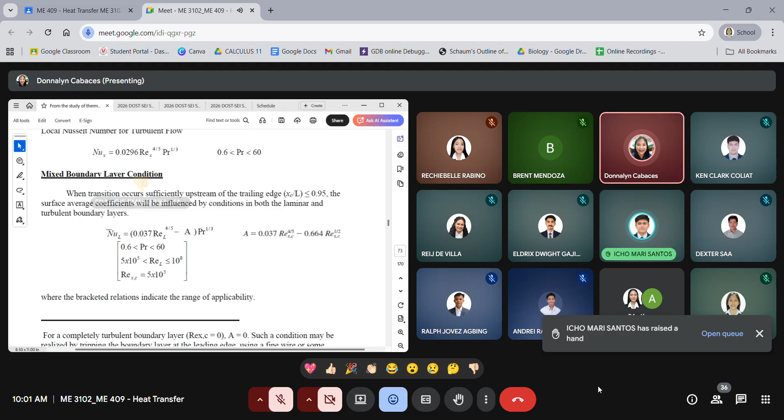May I know what was the last topic discussed in our module 6? How far did we get in our last discussion? We haven't been able to discuss since there was no internet last time, and then Thursday was our next class, so still nothing. We haven't started chapter 6 yet, chapter 5 also not yet. So we go to chapter 5, which is all about the introduction to convection, is that right?

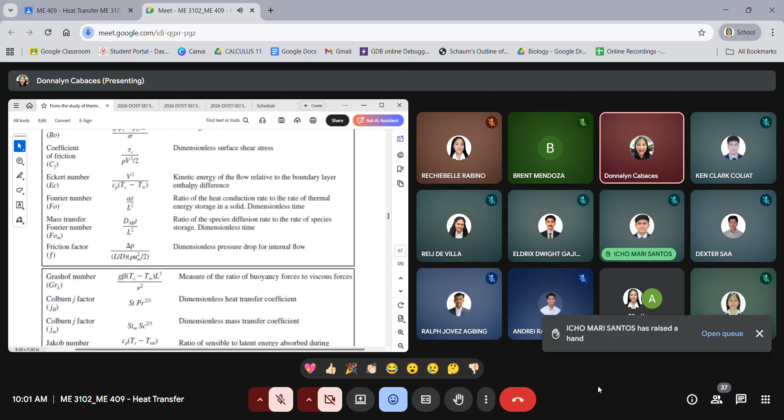Okay, let's go to our module 5 and discuss this one, and after this we proceed with our section 6. So our module 5 is introduction to convection.

So most of the topics here, part of module 5, were already introduced to you when we had our introduction, when we discussed the different modes of heat transfer in chapter 1. There are just additional concepts, and especially the last part, which is all about the dimensionless parameters that we are going to use in convection heat transfer analysis.

So for our intended learning outcomes for our module 5: differentiate velocity and thermal boundary layers of convection, and understand the different dimensionless groups of heat and mass transfer, their equation and interpretation.

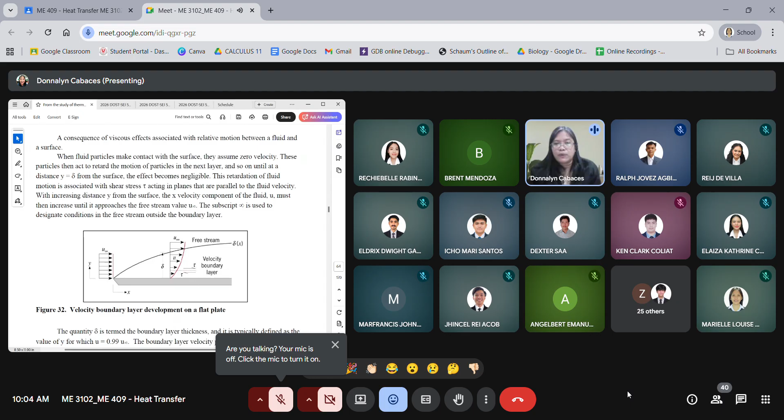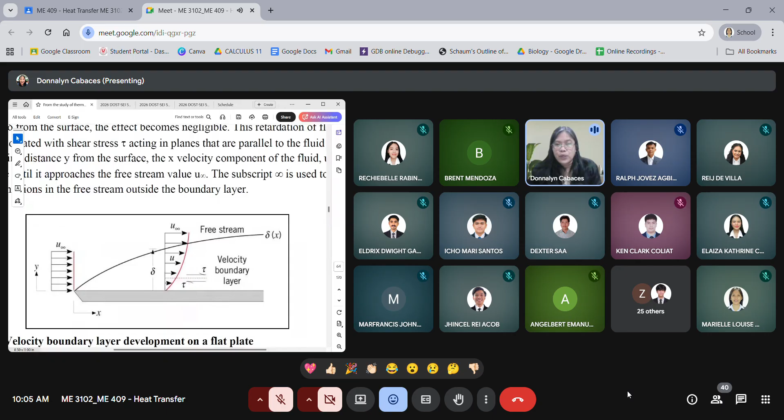So as you notice here in our figure, starting from the surface, the velocity of the fluid or the x component of the velocity is equal to 0 at the surface. But as it goes further away from the surface, the velocity of the fluid increases. And there is the so-called delta, the lowercase delta, which is the velocity boundary layer thickness.

As mentioned here, you have this distance y, which is equal to delta, and that is equivalent to this value. So this quantity delta is termed as the boundary layer thickness, which is typically defined for a value of y where the velocity is equal to 0.99 times the x component of the velocity of the fluid. So that's our quantity delta, which is our boundary layer thickness.

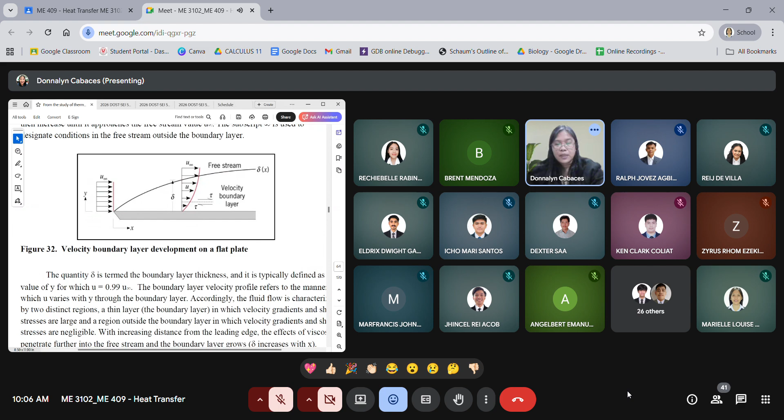So you have to determine this thickness in such a way that this value of the velocity is 0.99 times the x velocity component of the velocity of the fluid. So again, started from the velocity which is equal to 0, as you see from the profile, our red-colored diagram, the velocity increases from the surface.

And then, the other one is the so-called thermal boundary layer. Still, that is a consequence of heat transfer between the surface and the fluid. And as you see in our next figure, there is a difference between the velocity boundary layer and the thermal boundary layer.

So earlier, if this is a heated surface, our velocity profile started at 0 and then it increases as it moves further away from the surface. But for the thermal boundary layer development on an isothermal flat plate, what do you notice in the curve, in our red-colored curve?

Since this is the heated surface, the temperature is higher near the surface. But as it goes further away from the heated surface, the temperature decreases. So it's the opposite of velocity. Velocity goes from here to there, that's our curve from earlier. But here, since it's a heated surface, as you move away from it, the temperature of the fluid will decrease. So it's the opposite of our velocity and thermal boundary profile.

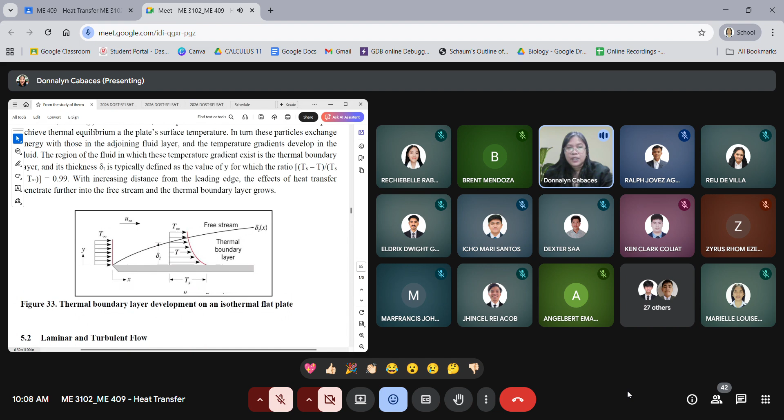Delta T, as mentioned here, is defined as the value of y for which the ratio of Ts minus T divided by Ts minus the temperature of the fluid is equal to 0.99. So you have to determine that value, and that is the so-called thermal boundary layer thickness.

So that is our value, the value of y for which the ratio of Ts, the temperature of the surface, minus T, the value of the temperature in our profile, divided by the difference of Ts minus the temperature of the fluid, equals 0.99. The value of y that corresponds to that ratio is the so-called thermal boundary layer thickness.

So that's the difference between our two profiles, the velocity and the thermal boundary layer development.

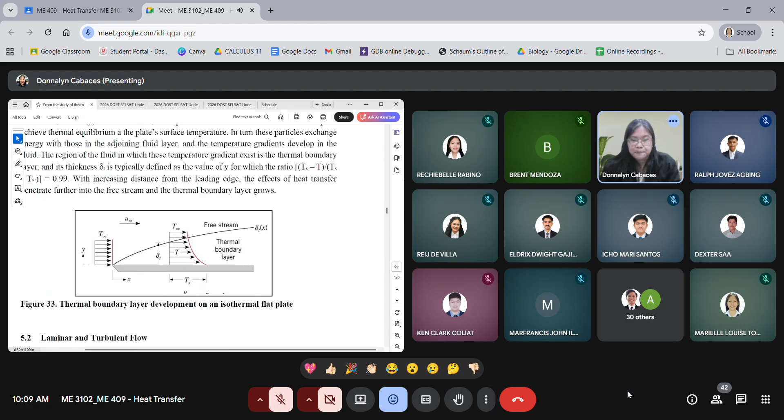Now the next section is laminar and turbulent flow. It's important to know first what type of fluid flow we have, because later, in our next chapters, you will see that the empirical equation we use to find the Nusselt number depends on the type of flow, whether it is laminar, turbulent, or in the transition region. So how do we know if it is laminar or turbulent?

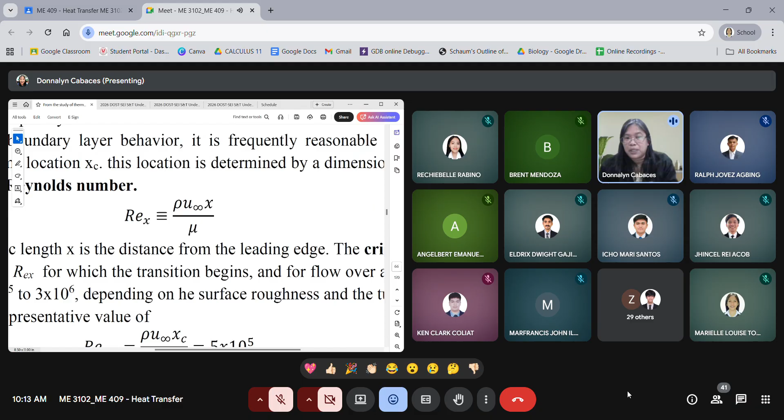So what are the components here? If we are talking about the Reynolds number at a specific point, that's why we have X. For example, on the flat plate we showed earlier, if we are just interested in, say, 0.25 meter from the leading edge.

Pag sinabi nating leading edge, balikan ko lang yung figure. Kung ito po yung ating 0 point, ito po yung ating leading edge. So kung halimbawa ito ay 1 meter long, yung ating flat plate, kung interested lang tayong alamin natin yung value ng Reynolds number sa ating part na ito na say 0.25 meters, ito po yung particular point X.

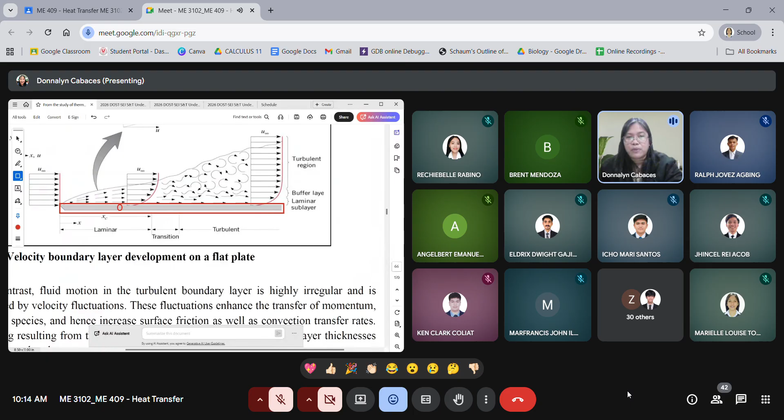Kaya tinatawag na Re_X. Pero kung interested tayo to determine yung ating Reynolds number sa entire length ng ating flat plate, then we make use of Re_L, ibig sabihin entire length. Yun lang po yung ating gagamitin na nomenclature.

So Re_X ay para sa specific point X. Ang rho po natin ay density. Ang U sub infinity po ito ay velocity ng fluid, at X po ay yung specific point. Ang mu po natin ay ang absolute viscosity. Minsan po hindi absolute viscosity at density yung binibigay, kundi yung tinatawag na kinematic viscosity, o yung makikita sa table. Ang relationship po natin, ang ating absolute viscosity divided by ating density, ay equivalent sa kinematic viscosity.

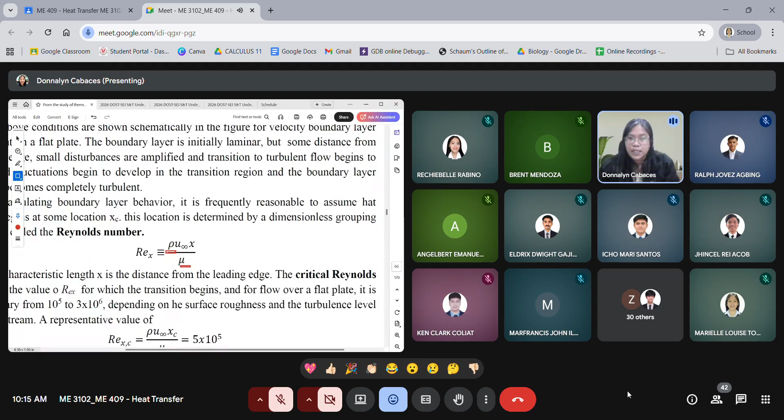So instead na ganito yung ating formula, it would be velocity times x divided by kinematic viscosity. Ang kinematic viscosity po natin, ginagamit natin ang lowercase v bilang symbol para dito. At ang values nito ay determined from the table of properties natin.

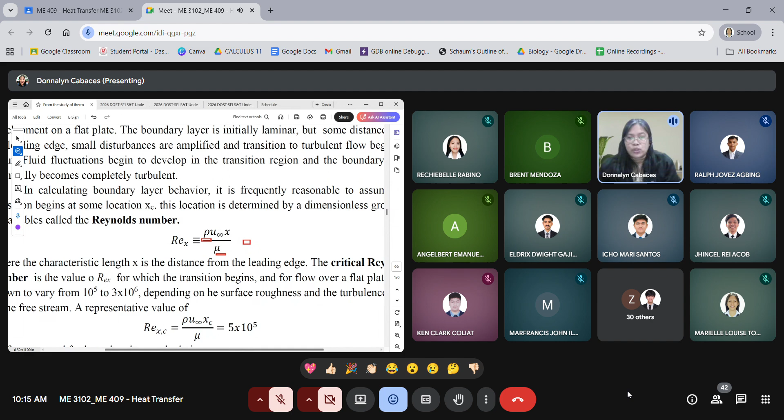Okay, so again po, yun po yung ating equation ng Reynolds number. Ang x ay ating characteristic length, distance from the leading edge, at ang rho ay density, velocity, at absolute viscosity.

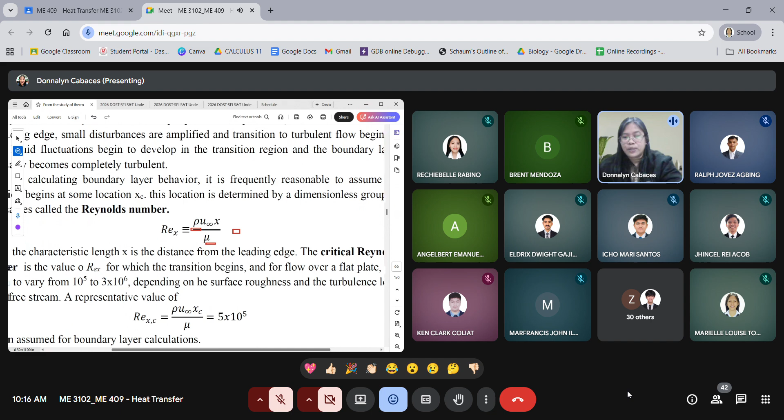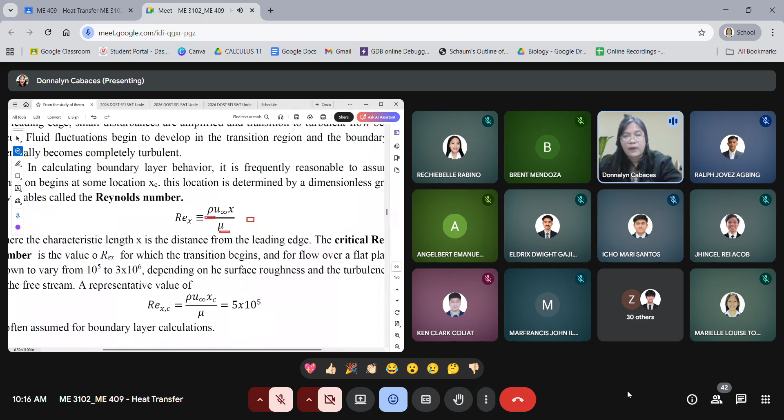So ngayon, values from 10 to the 5th to 3 times 10 to the 6th ay tinatawag na critical values ng Reynolds number. Ibig sabihin, below 10 to the 5th ay laminar, at above 3 times 10 to the 6th ay turbulent. So yung 10 to the 5th to 3 times 10 to the 6th, yun po yung tinatawag natin na transition region.

Pero isang representative value, which is equal to 5 times 10 to the 5th, ang ginagamit natin para ma-determine kung saan ang critical value o critical length, kung saan nagsisimula ang transition. Dito sa region natin kanina, laminar, transition, at turbulent, we make use of 5 times 10 to the 5th bilang representative value. Ito yung gagamitin natin later para ma-determine natin where is the critical point.

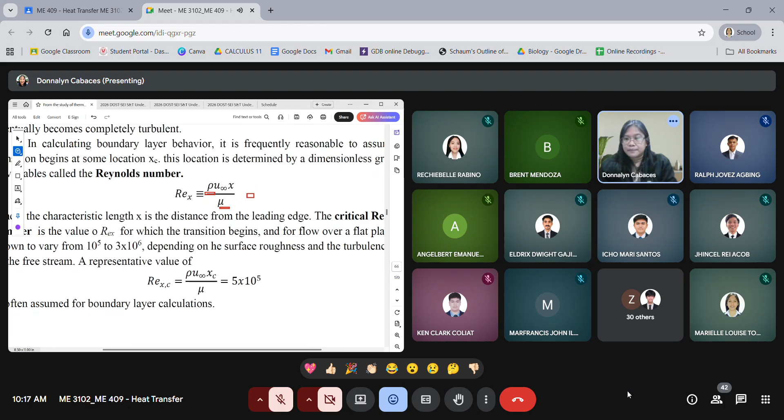Naintindihan po, class? Questions po or clarifications? Wala po. Okay po, sige po.

Punta po tayo sa ating next section. Ang next po natin ay yung mga different dimensionless parameters. So binigyan kayo ng table 5 ng iba't ibang selected dimensionless group ng heat and mass transfer parameters na gagamitin natin sa discussion o analysis ng convection heat transfer. Hindi ko na po ito iisa-isahin. I will leave this to you to study kung ano po yung tawag sa ating dimensionless group, ano po yung kanyang formula, at ano po yung interpretation o definition nito. Pero ang definition dito ay refers to the formula for each dimensionless parameter, at meron din tayong interpretation.

Banggitin ko lang po yung most commonly na magagamit natin sa ating discussion from chapter 6, 7, and 8, which are all about convection. We talk about external flows and internal flows. Under ng external flow, meron tayong forced and free convection. Under ng force, yung ating external and internal flows, at meron din tayong free convection. Na-discuss ko na sa inyo during our introduction kung ano yung pinagkaiba ng forced and free convection. Una nating didiscusin yung forced convection, in which there are two types, the external flow and the internal flow. Dapat ma-identify nyo muna kung ano yung type ng ating convection heat transfer, kasi magkaiba din ang empirical correlation na gagamitin natin for external flow, for internal flow under forced convection, and also for free convection.

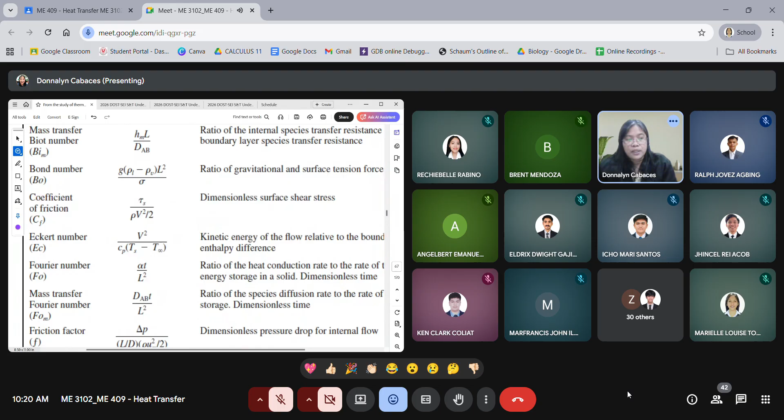So these are the dimensionless parameters. We have the Biot number, the Bond number, the coefficient of friction, the Eckert number, the Fourier number, the mass transfer Fourier number, the friction factor. Then we have the Grashof number.

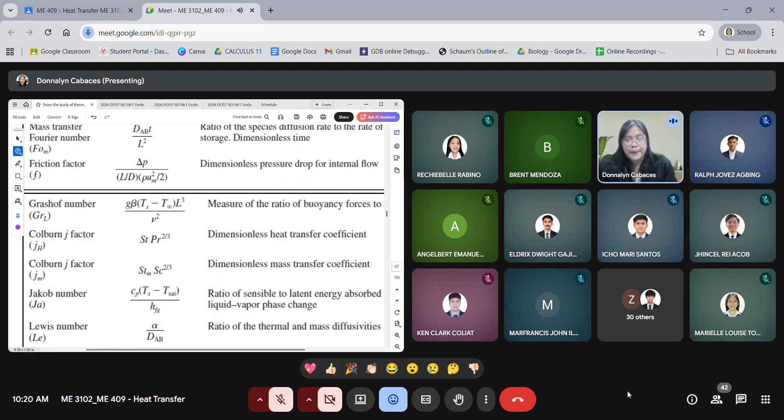The Grashof number we will use in our free convection discussion. We have the Colburn factor, the Jakob number, and we are also going to make use of this in our discussion of free convection.

We also have the Lewis number, the Mach number, the Nusselt number, Peclet number, Prandtl number, Reynolds number, Schmidt number. These dimensionless parameters will be commonly used in our discussion and analysis of convection heat transfer.

What is the Nusselt number? The Nusselt number is the ratio of convection to pure conduction heat transfer. If the value of our Nusselt number is equal to 1, it means our convection and conduction heat transfer are somehow equal. If it is less than 1, it means our conduction heat transfer is higher than our convection. If it is higher than 1, then convection heat transfer prevails.

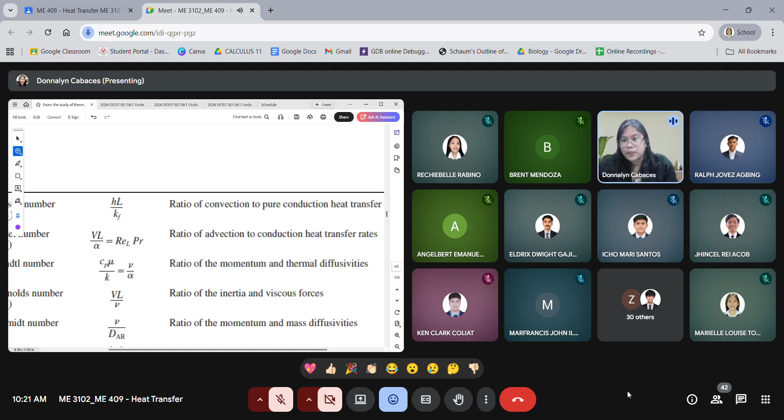Look at this equation or formula for the Nusselt number. Nusselt number is equal to HL over K. Our H is the convection heat transfer coefficient. Our L, if we are talking of NuL. But if it's a specific point, that would be represented as NuX, so it would be X instead of L. Your K here is your thermal conductivity.

So when or where are we going to make use of this Nusselt number? The Nusselt number will be obtained empirically, meaning we are going to make use of the empirical correlation. What is the meaning of empirical correlation? They are equations that have been obtained through a series of experiments by different authors.

So they conducted experiments. Later, we will present the setup they used in their experiments. They conducted several experiments, they have their results, and what they do is try to represent or interpret the results and make use of correlations. So they develop their correlations for specific applications in our convection heat transfer analysis.

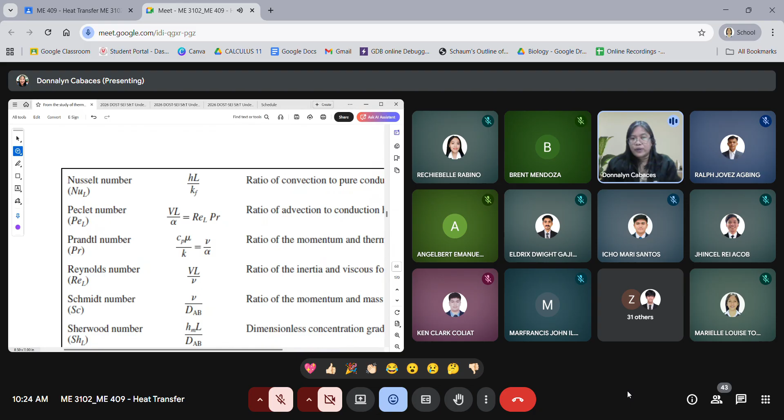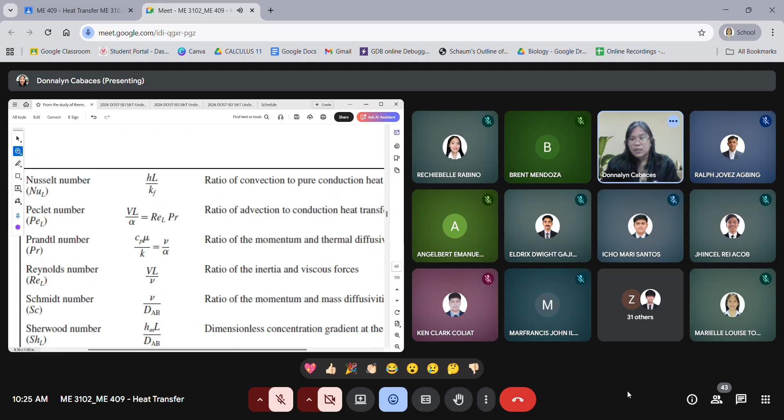So here is one equation: VL over nu. Again, V is velocity, L is the length, and nu here is the kinematic viscosity, which is the ratio of inertia and viscous forces. We also sometimes use the Schmidt number, if you are given the kinematic viscosity and the value of the mass diffusivity, that is the ratio of momentum and mass diffusivity. Then we also have the Sherwood number, Stanton number, the mass transfer Stanton number, and the Weber number.

The formulas and definitions I discussed are the most commonly used in our convection heat transfer analysis.

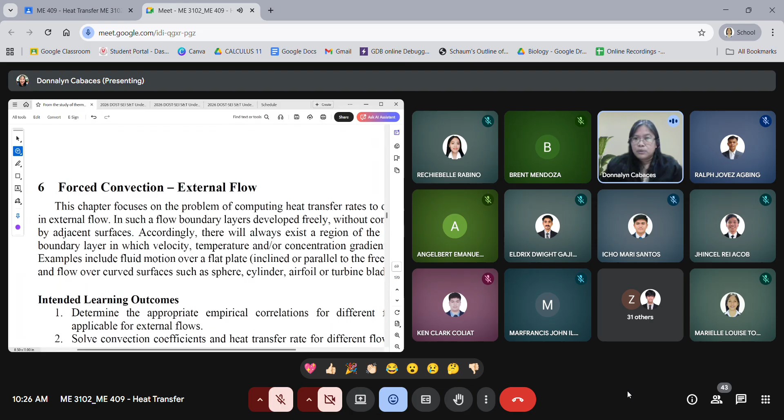Okay, sige po. Punta po tayo sa section 6, which is forced convection. Again po, we will be analyzing force and free convection. So this chapter focuses on the problem of computing heat transfer rates to or from a surface in external flow. So yun po yung ating chapter 6.

So force convection po siya, external flow. Ang chapter 7 po natin ay force convection, internal flow. So again, as we mentioned last time when we had the introduction to convection, when we say force convection, we are making use of external forces in order for us to have the fluid flow.

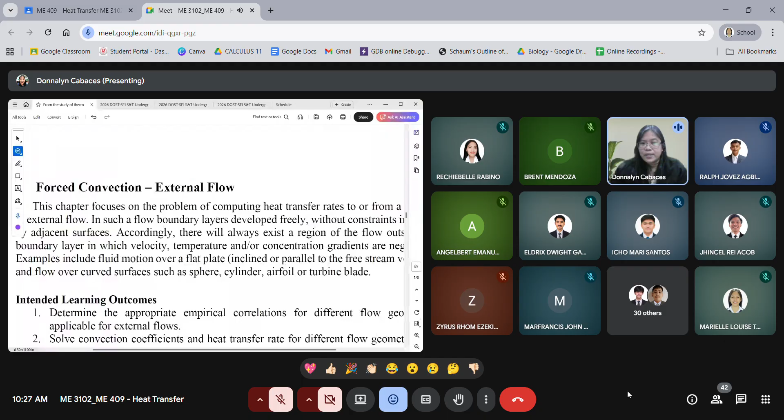So in such a flow, boundary layers develop freely without constraints imposed by adjacent surfaces. So accordingly, there will always exist a region of the flow outside the boundary layer in which the velocity, temperature, and or concentration gradients are negligible. And examples include fluid motion over a flat plate, inclined or parallel to the free stream velocity, and flow over curved surfaces such as sphere, cylinder, airfoil, or turbine blade.

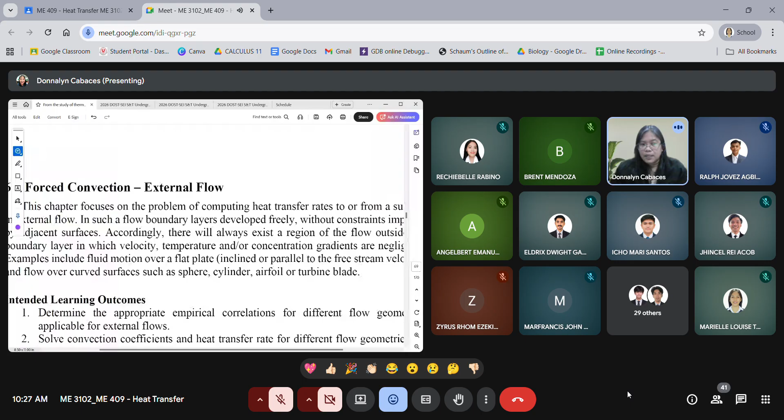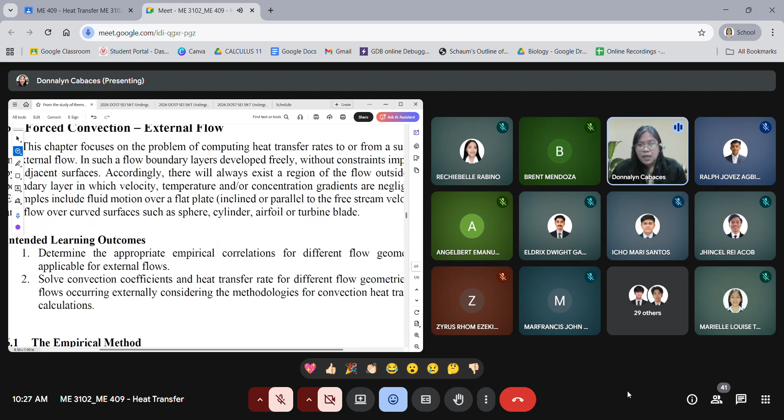So our intended learning outcomes for this chapter: determine the appropriate empirical correlations for different flow geometries applicable for external flows and solve convection coefficients and heat transfer rate for different flow geometry occurring externally, considering the methodologies for convection heat transfer calculation.

So as you see in our intended learning outcomes, the first one is for us to identify or to determine the appropriate empirical correlations. And then after that, we will be solving yung ating value ng H and also yung convection heat transfer values or rate.

No? So, as we proceed with our discussion, alam natin na siya ay force convection and external flow because that is the chapter that we are discussing. Pero later, kapag po tayo ay nakatapos na nung next 3 chapters natin, nung force convection, external and internal flow, at saka ng free convection, labo-labo na po yung ating problem, no?

So you will be the one to identify first whether are we talking of force or free convection, no? And after po na malaman natin na siya ay force convection, identify are we talking of external or internal flow. Madali lang naman kung alamin yun, ano?

So titingnan mo lang kung siya ay meron bang external means, external forces to have the fluid flow or the fluid motion. Kung meron, so that is force convection. Kung wala, that is free convection.

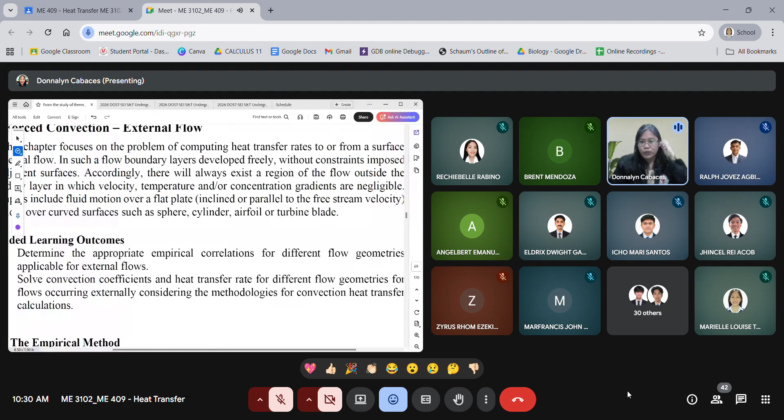No? So merong different types ng fluid na ginamit ng ating authors. Some of them, they use air, they use water, they use engine oil, they use other gases. And then they tried it at different velocity and they tried it at different temperature of the fluid. And they measure yung ating surface temperature, no?

And then after that, since they conducted several values of the parameters, so nagkaroon sila ng iba't ibang or ng maraming data. So once they have the data, they try to analyze and interpret the data, and they come up with the empirical equation in which that equation represents yung kanilang results na nakuha.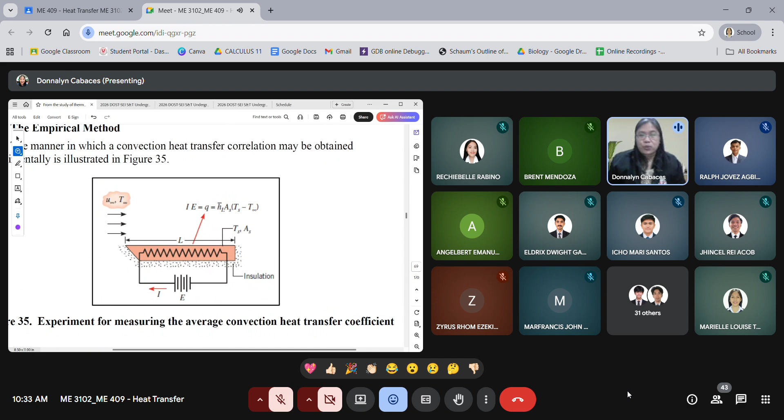So if you want, you can go into this experimental setup in our project study and to prove something about the empirical equations and then try to evaluate or to make use of other geometry, or it can be other types of fluid with different fluid velocity and temperature, and baka makakam up tayo ng sarili nating empirical equation. So yan po yung ginamit nilang setup or experiment in order for them to come up with the different empirical equations that we are going to have later.

Okay? So the different dimensions, the different empirical equations emanate from this.

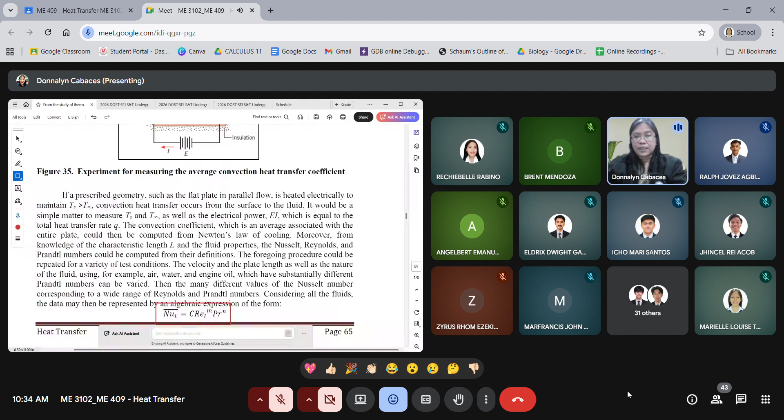Ito po yung naging generic na representation natin ng formula ng Nusselt number. That is equal to C times the Reynolds number raised to M times the Prandtl number raised to N.

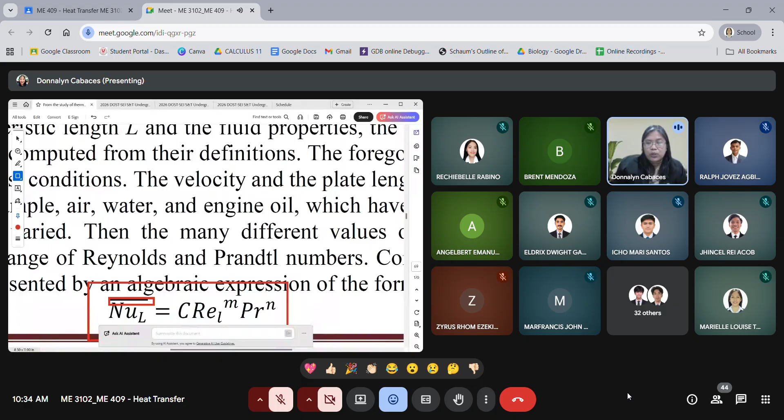So itong may bar na ito sa itaas, that represents average Nusselt number. Pag po wala yung bar dito sa taas, that is the local Nusselt number. So ano po yung pinagkaiba ng average at saka ng local Nusselt number? It is local kapag specific point lang along, say, the surface ng ating flat plate. Pero kung ang pag-uusapan natin is the entire length of the flat plate, then we will be talking of the average Nusselt number.

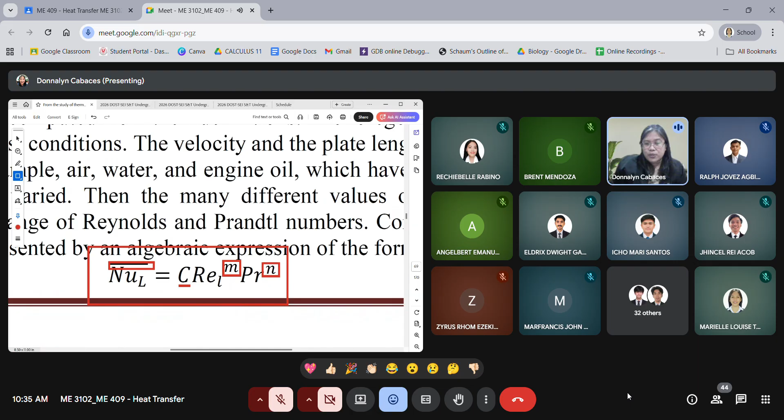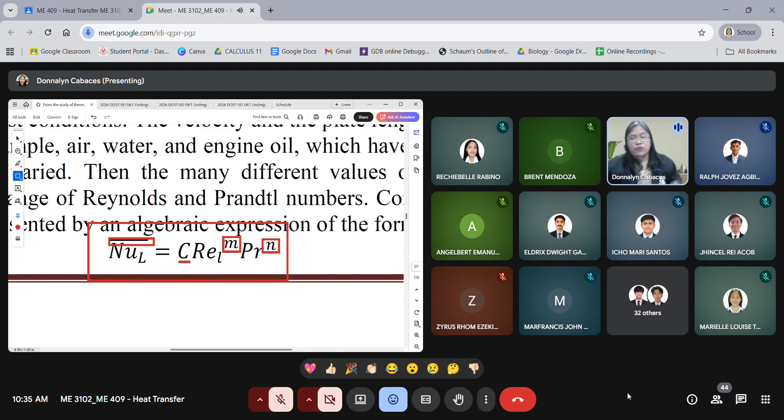So as you will see later, there would be some differences in the value of C, that is the numerical coefficient or constant. The value of M, which is the power or exponent of the Reynolds number. And our N would be the power or exponent of our Prandtl number. So ayan po ang ating equation para sa Nusselt number. As we proceed later, you will see difference in value of C, M, and N for the different geometries that we are going to discuss.

Punta po tayo sa ating next page. Take note that we are now to define the so-called film temperature. Ano po yung film temperature? Film temperature is the average of the surface and the fluid temperature, in which most of the properties are to be evaluated in this film temperature.

Ma'am, ano po yung properties? So yung mga properties na kailangan natin kuhanin sa table, properties po ng material natin na gagamitin. So you have to evaluate po yung film temperature.

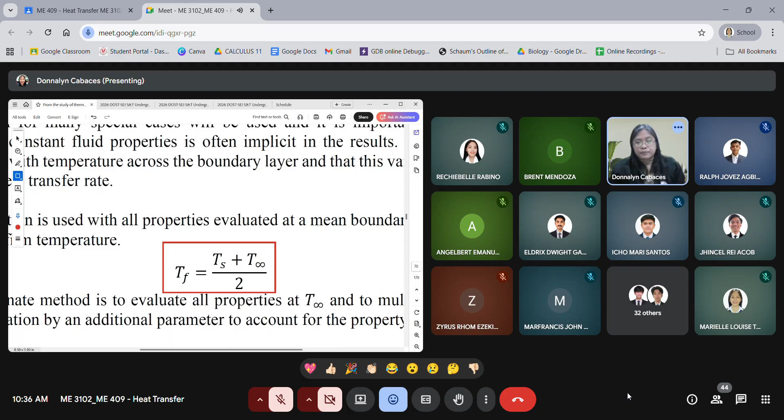Take note later sa mga empirical equations natin, meron pong mga properties that are to be evaluated at the fluid temperature. So kapag po sinabi ng requirement natin doon sa ating empirical equation na the properties are to be evaluated at the fluid temperature, then you have to evaluate them at fluid temperature. Kung hindi po na-mention, it is understood that you have to evaluate this at the film temperature. Sometimes po, meron din tayong subscript na S, which means that the property is to be evaluated at the surface temperature.

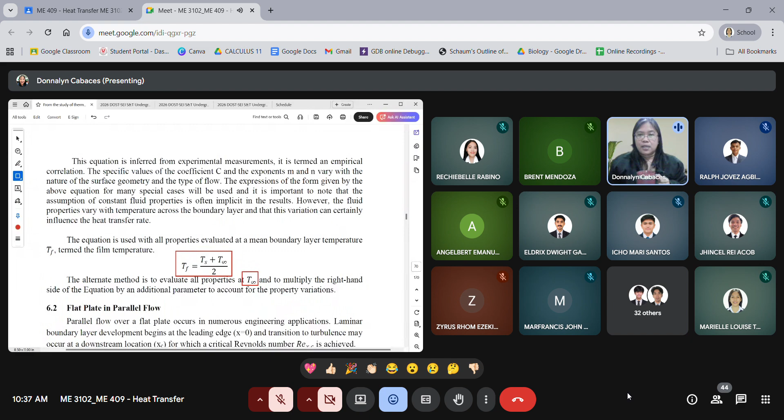So yun po yung ating initial discussion about po yung ating module 6. Now we proceed po with flat plate in parallel flow.

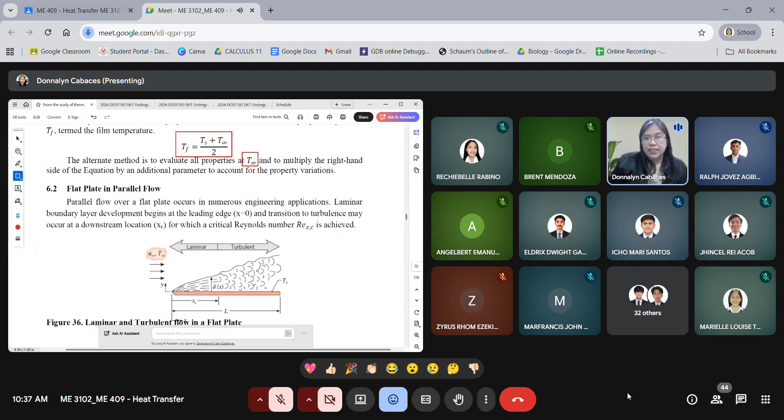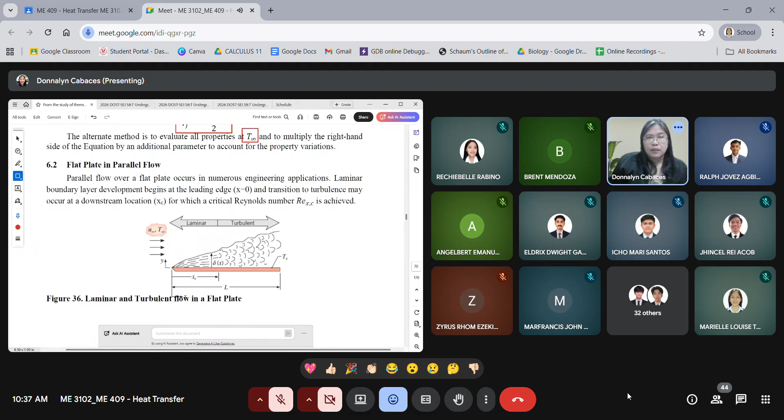So yan din po yung figure natin kanina, yung pinakita natin, yung laminar, turbulent, and the transition. This one is the laminar, then this point is the transition, and then you have here your turbulent flow. And this is a flat plate. We have here the velocity of the fluid and its temperature and the surface temperature of the flat plate.

Now, if we talk of convection heat transfer calculation, we have here the methodology for a convection calculation as suggested by the author of our reference book, DeWitt, Incropera, et al., Bergman, and Lavine. Sila po yung authors ng ating book or reference material.

So di ba, gagamitin pa rin po natin yung ating methodology for heat transfer calculation such as yung known, yung find, yung schematic, yung assumptions, yung properties, and then yung analysis at saka po comments. So under ng ating analysis, ito po yung ating susundin.

Ang una po, hindi po nakalagay dyan kasi nga chapter by chapter tayo or topic by topic. But the first thing that you have to know, kapag po tayo ay magsusolve na later, kailangan nating i-identify kung alin bang chapter yun. So you have to check first, are we talking of force or free convection? After knowing that it is force convection, are we talking of external or internal flow?

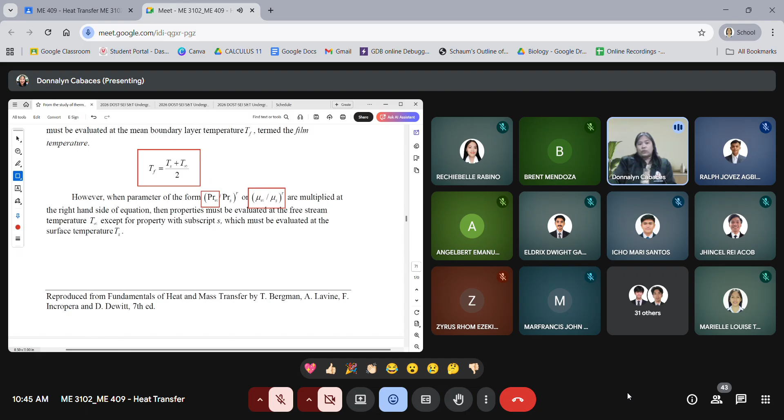Now, these are the empirical correlations that you are going to make use of. For external flow, that's already in your module. This one is for flat plate in parallel flow. So for flat plate, if we are talking of laminar flow, that means the value of the Reynolds number is less than 5 times 10 to the 5th. So we have our empirical equation for the local Nusselt number - this is our equation.

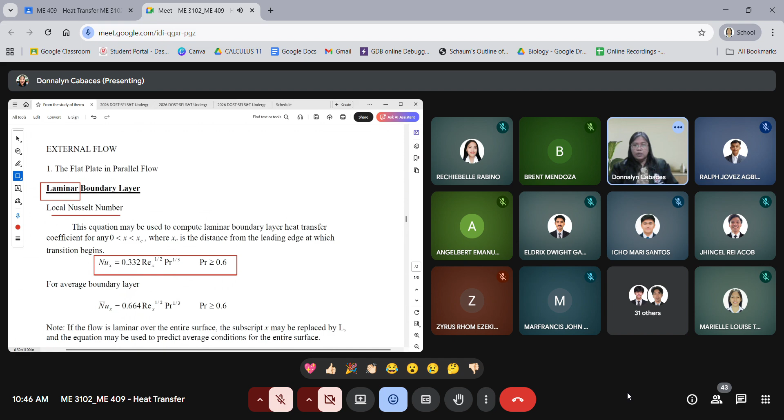And what's on the side, like this Prandtl number greater than or equal to 0.6, that is the point of applicability. So take note that this is for laminar flow, so our value of x is greater than 0 but less than the critical point.

Okay, so ang atin pong formula, 0.332, square root of the Reynolds number, cube root of the Prandtl number. Again, 0.332 is the value of C. Ang value natin ng M ay 1/2, ang value natin ng N ay 1/3.

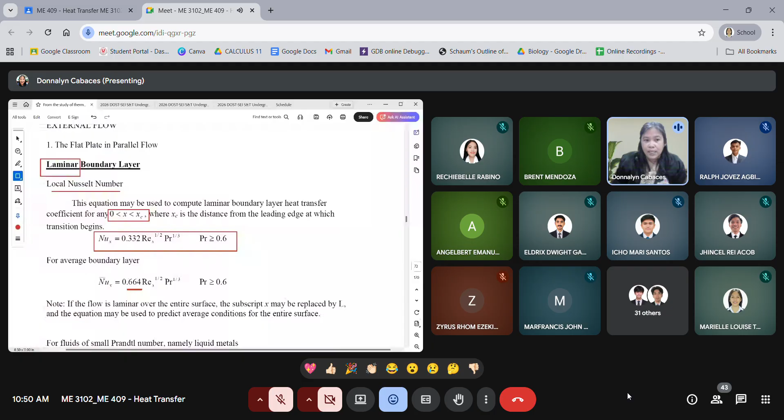Okay, so next po is for average boundary layer. As you see here, so ito ay local, 0.332. Yun pong ating average. As you notice, ang magkaiba lang po sa kanya is yung numerical coefficient. So naging 0.664, so it is just times 2. Kapag po local at kapag po average, you just multiply it by 2.

So note, if the flow is laminar over the entire surface, the subscript x po may be replaced by L, and the equation may be used to predict average conditions for the entire surface. So instead of NUX, you can make use of NUL.

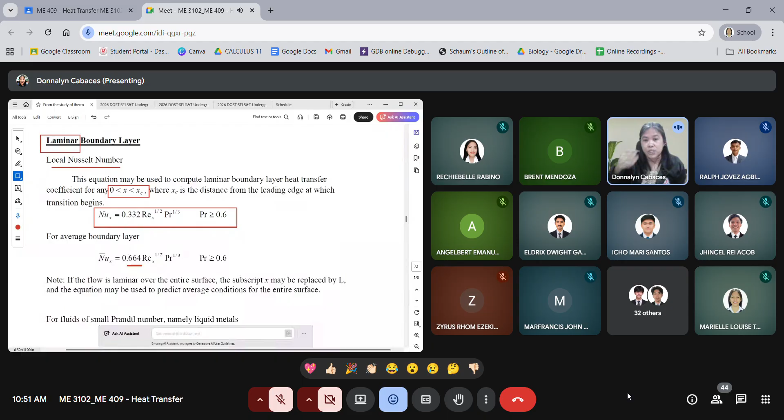Okay, and again po, yung notation natin ha. Pag local, ganyan lang. Pag po average, merong bar. So after this, pag nalaman natin yung ating Nusselt number, saka nyo kukunin yung value ng H, yung formula natin na HL over K. So out of that, you will find the value of H, and then you will find your Q convection.

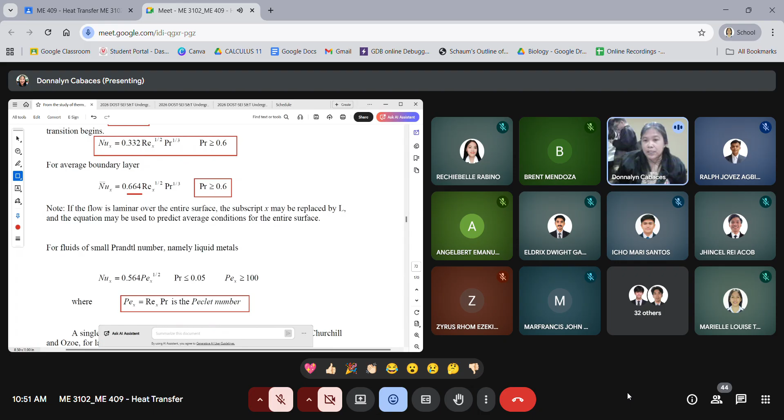Now, for small or for fluids of small Prandtl number, kasi ang requirement natin dito sa una, ang Prandtl number should be greater than or equal to 0.6. So what if mabababa lang yung value ng Prandtl number? So for this, for Prandtl number less than or equal to 0.05, but there is the requirement of the Peclet number. So take note that Peclet number is the product of the Reynolds and the Prandtl number.

If it is satisfied, then you can make use of this equation for the Nusselt number: 0.564 times the square root of the Peclet number. Okay, so another empirical equation po, a single correlating equation which applies for all Prandtl number, by Churchill and Ozoe.

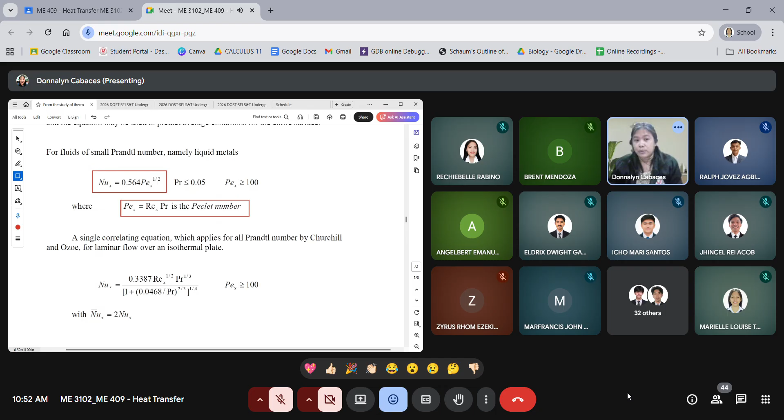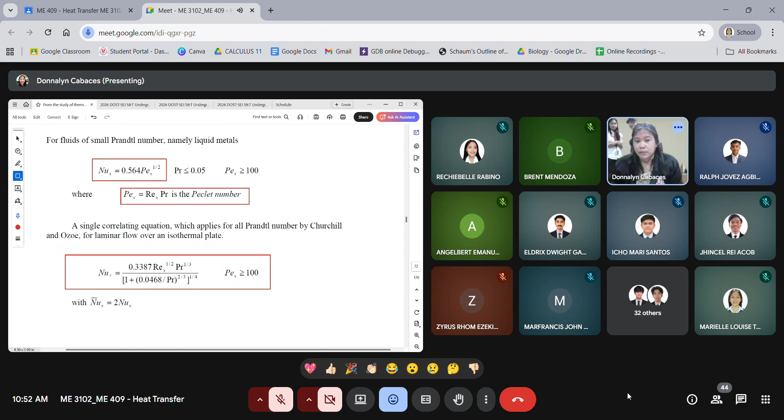So the laminar flow over an isothermal plate, we have this equation. Medyo mahaba na po yung equation kaya hindi natin yan pinapasaulo sa inyo. Okay, so take note of how you are going to press it in your calculator. And that is for the local, and for this one is for the average. As I mentioned a while ago, when you are asked for the average, you just multiply it by 2.

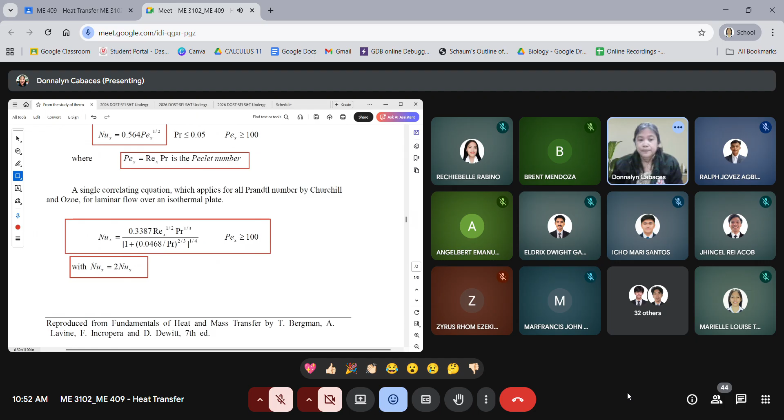Now, then another equation po, para naman po sa turbulent boundary layer. So pag turbulent boundary layer, this will be now our empirical equation. So iba na po yung value ng C at iba na rin po yung value ng M. And this is the range of applicability for the Prandtl number. So kailangan pong masatisfy para magamit natin yung empirical equation.

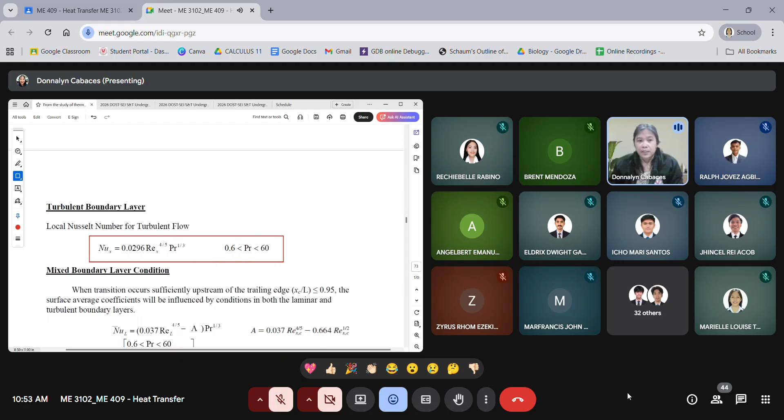That is for turbulent. Now what if we are talking of the mixed boundary layer? So sa mixed boundary layer po, when transition occurs sufficiently upstream on the trailing edge, there is a requirement, XC is the critical point divided by L should be less than or equal to 0.95. So this would be our empirical equation.

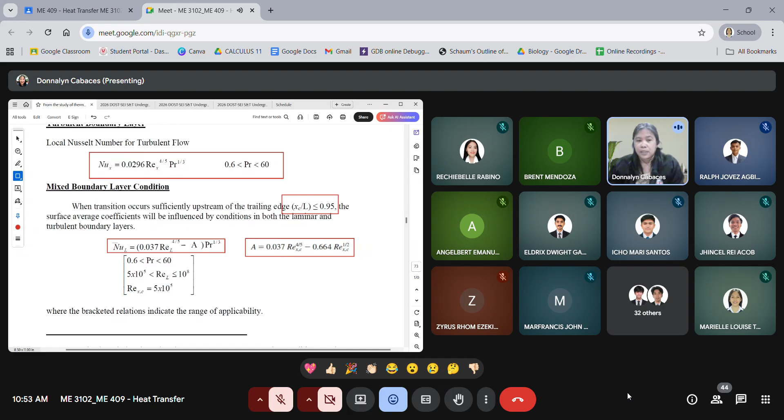That your NUL is equal to 0.037 Reynolds number to the 4/5 minus A, times your Prandtl number to the 1/3, in which this is the value of your A. You have to calculate for the value of your A. Range of applicability, the Prandtl number should be greater than 0.6 but less than 60. And then, yung atin pong value ng Reynolds number, 5 times 10 to the 5th to less than or equal to 10 to the 8th.

And again, reminding you, your critical value of the Reynolds number is 5 times 10 to the 5th. So you have to make use of this one to calculate for the value of A.

So there is a note here that for a completely turbulent boundary layer, your REXC is 0 and A is equal to 0. Such condition may be realized by tripping the boundary layer at the leading edge using fine wire or some other turbulence promoter.

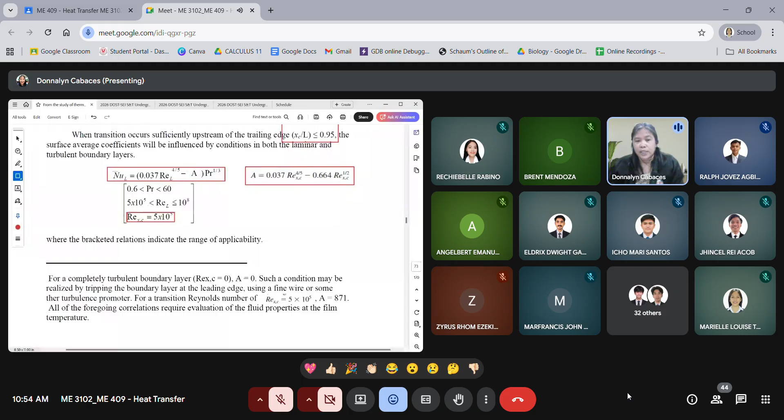For a transition Reynolds number of 5 times 10 to the 5th, A is equal to 871. So ito pong value ng A natin is 871 if you make use of 5 times 10 to the 5th.

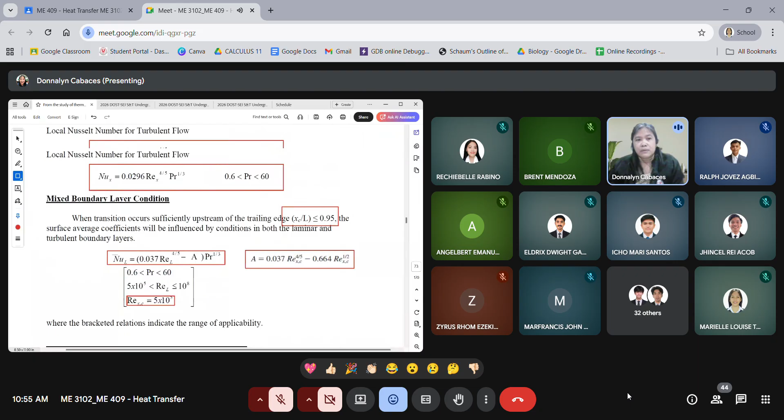All of the foregoing correlations require evaluation of the properties at the film temperature. Again, if we say film, that is the average of surface and fluid temperature. So that's for our flat plate, for laminar, for turbulent, and for mixed boundary layer.

Let us try to solve example 6.1. Air at a pressure of 6 kilopascal and a temperature of 300 degrees Celsius flows with a velocity of 10 meter per second over a flat plate, 0.5 meter long. Estimate the cooling rate per unit width of the plate needed to maintain it at a surface temperature of 27 degrees Celsius. So try to analyze the given. Please lay out the known, the find, the schematic, and then let's find the properties in our table.

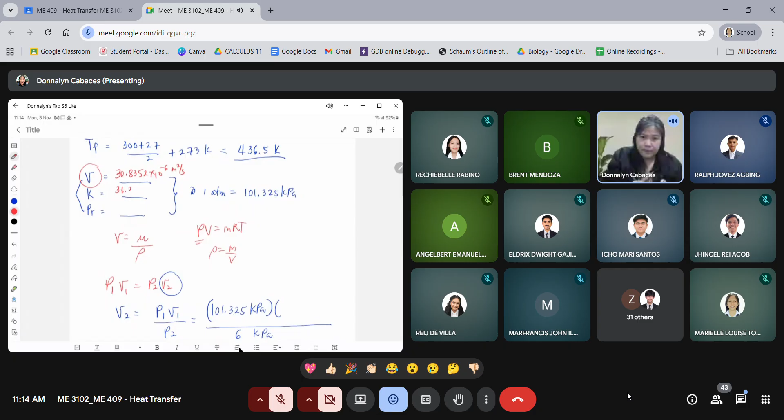Next, the thermal conductivity and the Prandtl number. 36.355 times 10 to the negative 3 watts per meter Kelvin. And our Prandtl number, based on the chat from our classmates, is 0.6878.

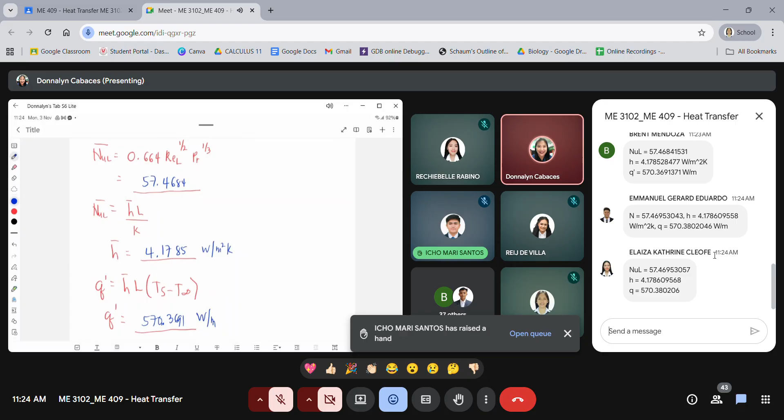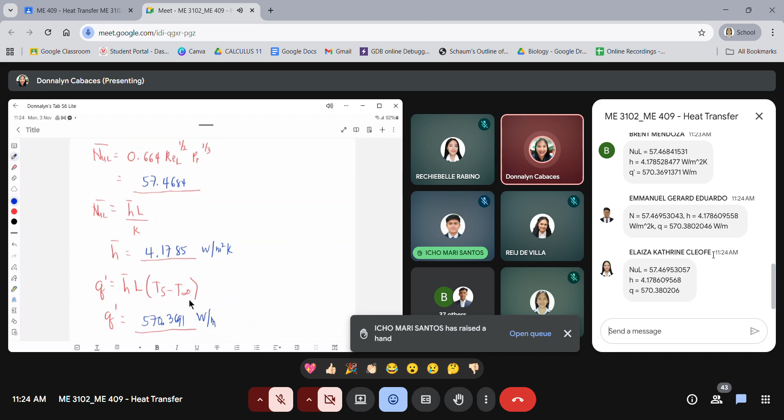Okay, same po nang nakuha ni Emmanuel, same with Elaiza. Okay, so sige po, wag na pong mag-chat. Raise hand na lang po yung mga nakakuha po ng ating values para we know po kung sino-sino po yung mga nakakuha na ng values natin.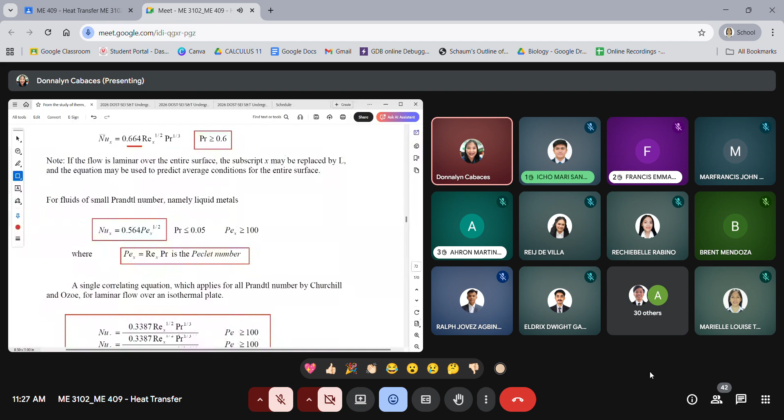Okay, so ayun po yung ating example 6.1. So para po doon sa ating next example problem, please try po yung atin pong example problem 6.2. Ito po ay application pa rin ng ating flat plate.

Nasaan na yung 6.2? Ito po ano? So, a flat plate of width 1 meter is maintained at a uniform surface temperature of 230 degrees Celsius by using independently controlled electrical strip heaters, each of which is 50 millimeter long. If atmospheric air at 25 degrees Celsius flows over the plate at a velocity of 60 meters per second, at what heater is the electrical input a maximum? And what is the value of this input?

Okay, so try po ninyo ha, para mabilis po ang discussion natin next meeting para po dito sa ating example 6.2. And then maki-study nyo po nung next part po natin, yung cylinder in cross flow.

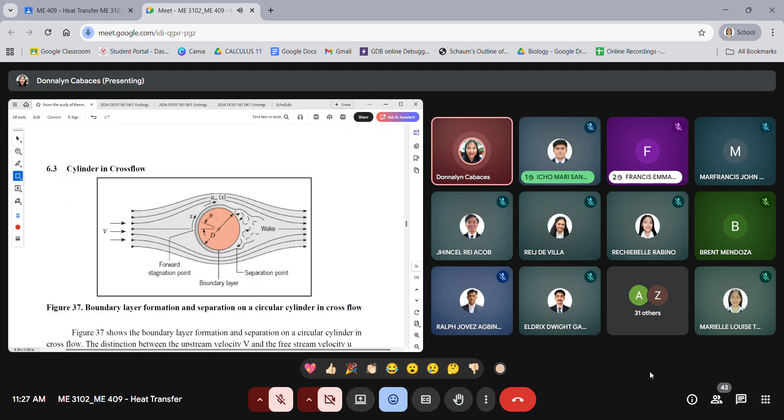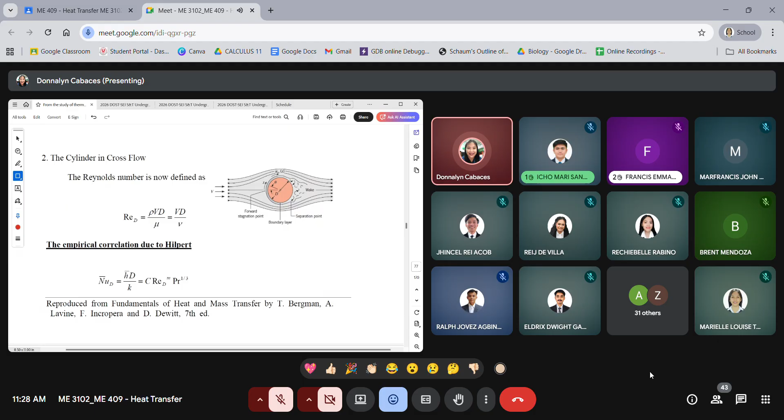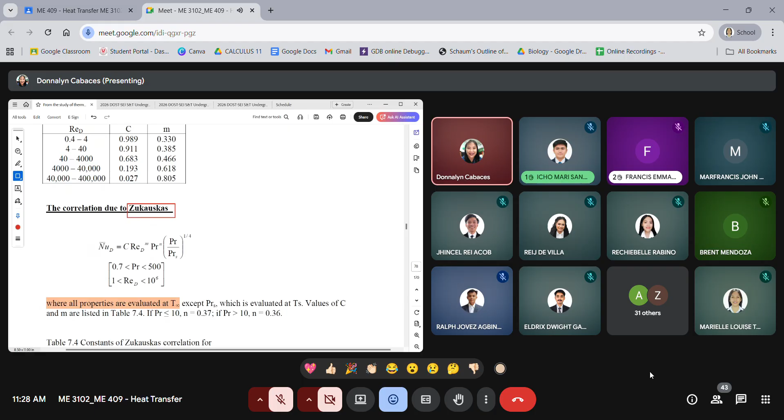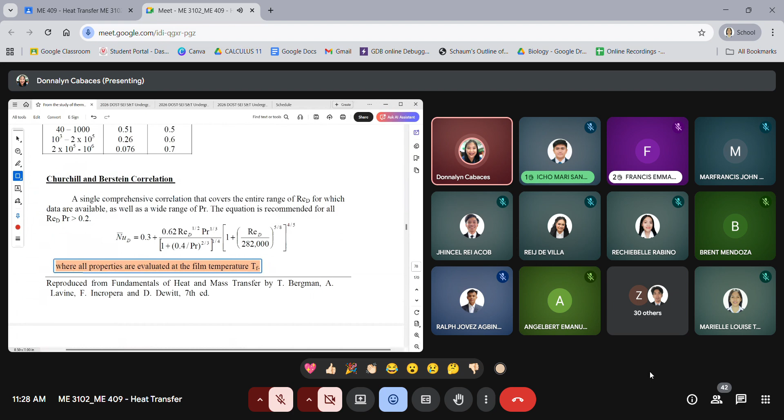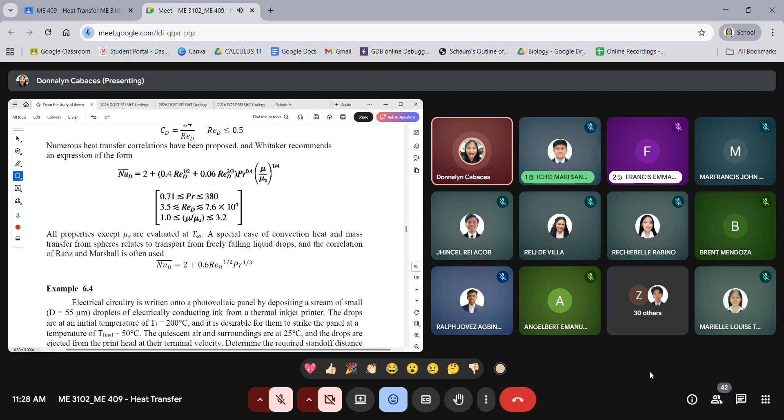And same thing po, if you can try po solving yung ating example 6.3 and study also yung empirical equation para po kay sphere. So kay sphere naman po, we have Whitaker and then meron din po tayong kay Ranz and Marshall. Di po ata napasulat ang Ranz and Marshall. Oo, nawala yung kay Ranz and Marshall. Meron pa po si Ranz and Marshall.

Then after that po yung flow across tube banks. Medyo mahaba pa po itong ating section 6, so we will try to finish po next meeting, at least man lang po ay hanggang sa sphere. Okay, isang example sa cylinder, isang example po kay sphere. So try to solve po and study the empirical equation so that you will know kung alin po yung gagamitin at saka yung kanilang range of applicability.